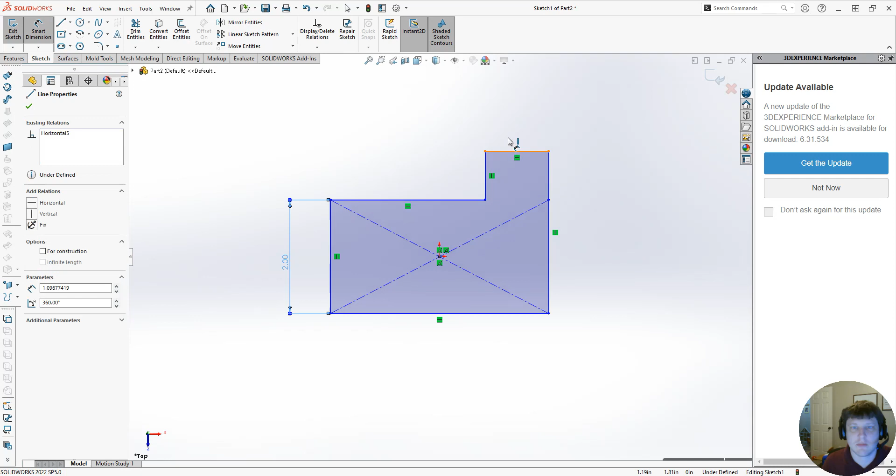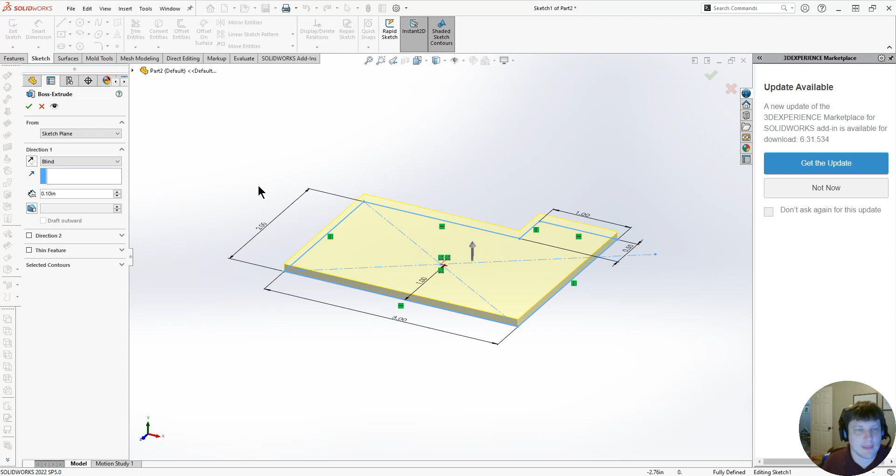And we'll just make that 2 inches, 1 inch, 3 inches. And since we lost our concentric there, or our center line there, we'll just make that 0.5. So there, we're going to make it half an inch thick.

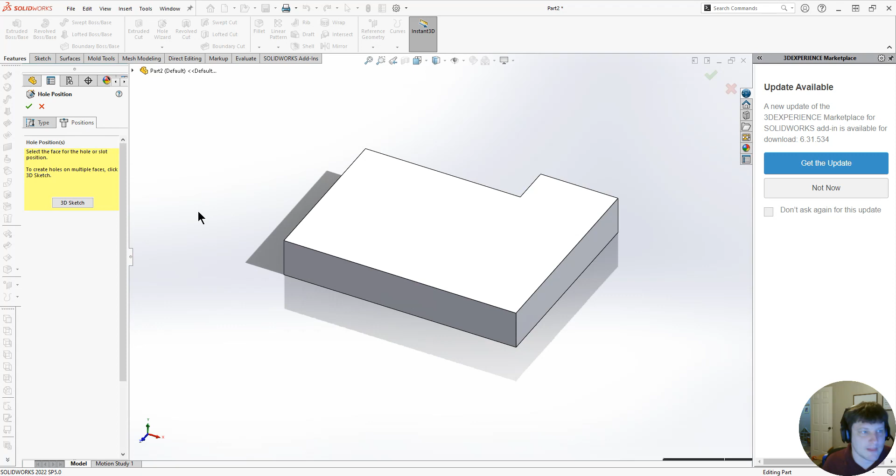Now we want to put some holes in it to mount to. Just want standard holes. Positions. So we'll just place some holes.

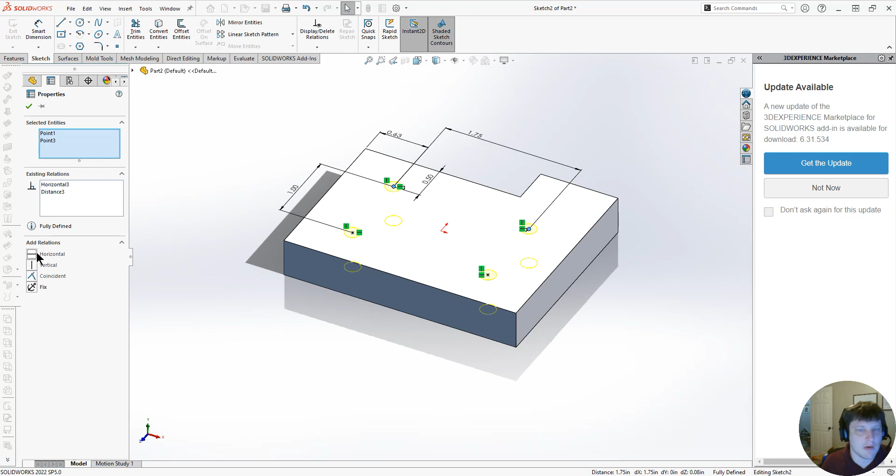Always constrain your things. Leads to so much happier times whenever you need to make modifications. Horizontal. Now I got those holes constrained. Through all, I don't really care what size they are.

Okay, so now let's finish off the top of this. Add some fillets. So right now this is just a solid block. Half inch thick, not a good candidate for injection molding. You want minimal wall thickness for injection molding. But we're going to get to that.

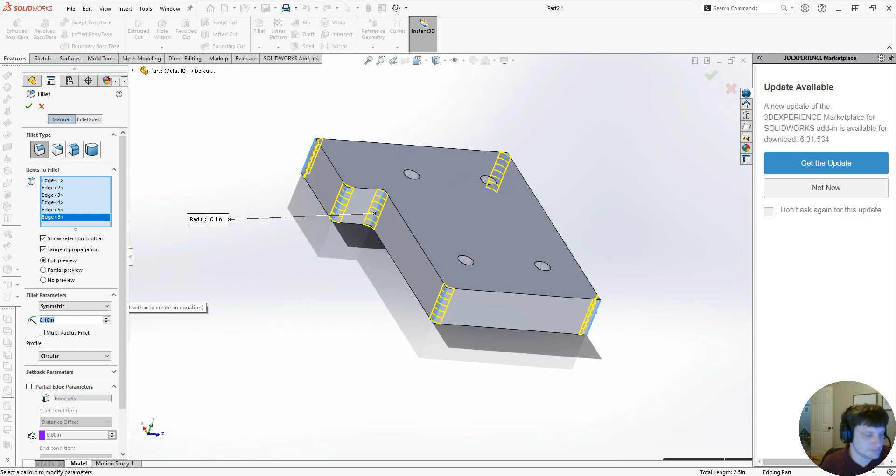So we're going to add some radiuses. Let's make them... too much. 1/4 of an inch, that'll work. And then we want a radius on the top. Oh, before we do that, let's draft this bad boy.

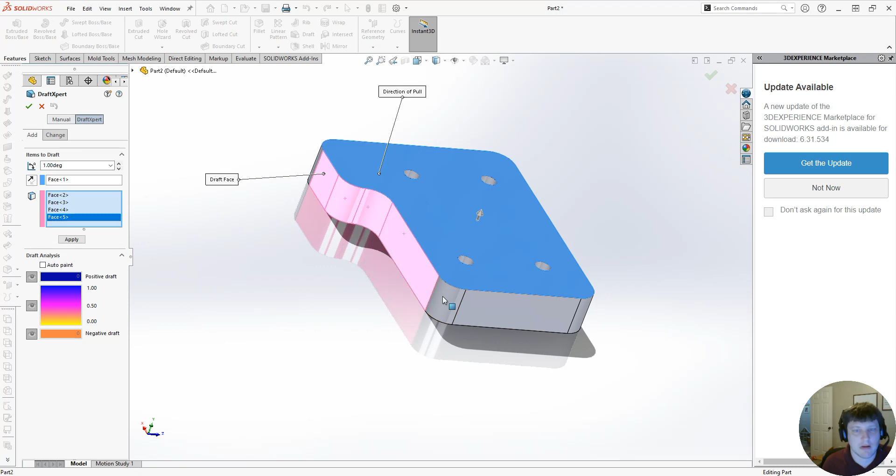Anybody know a way to do this without having to click every single face? That's been frustrating me in SolidWorks for quite some time. Give it 3 degrees of draft. There we go.

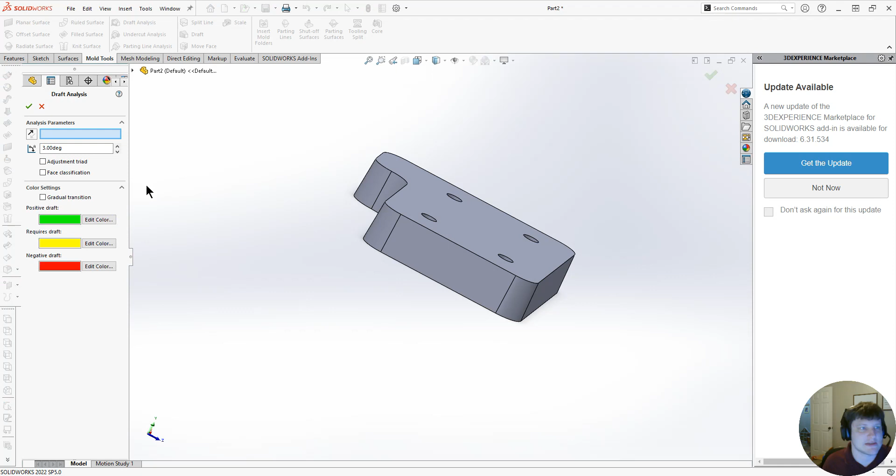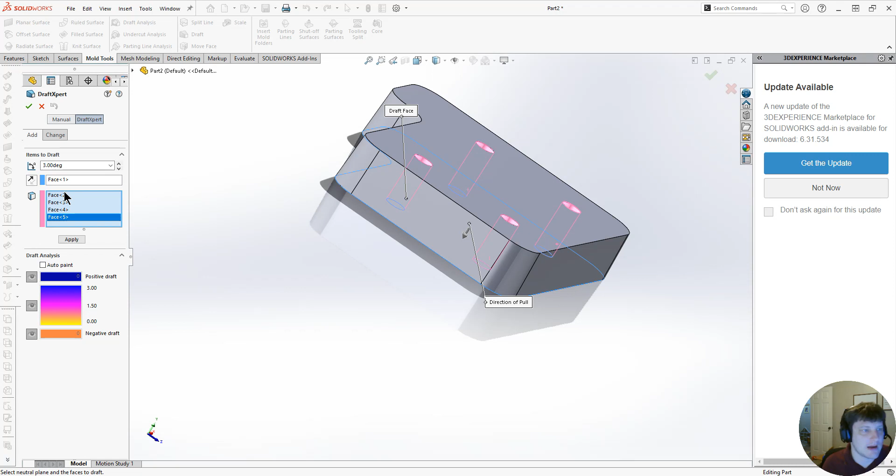Now you can see. So let's go to Mold Tools, Draft analysis. There we go. Our draft is all in that direction. So we're good. Now our holes should be drafted as well, so we'll go ahead and add some draft to those. Draft them from this side. Just 1 degree of draft on those.

So now let's do draft analysis again. Oh, that's why, 1 degree. So we can see all those surfaces are red. All these surfaces are green, which means that's the split of the mold.

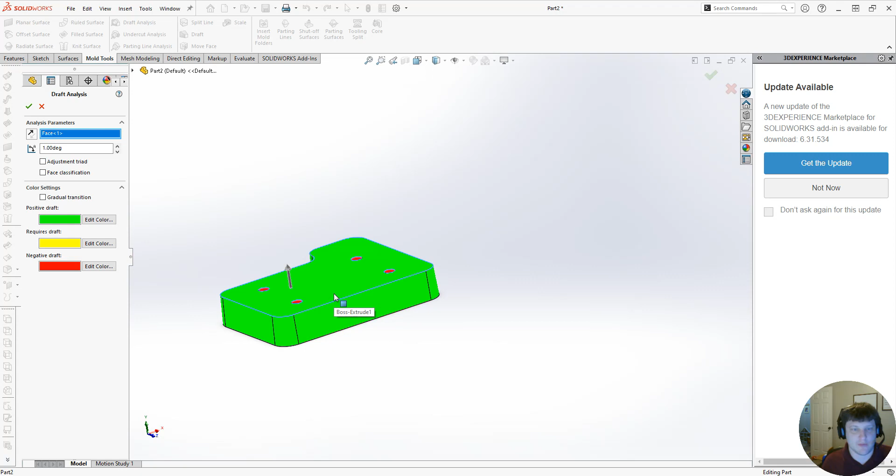So the green will become the cavity and the red will become the core, or the green will become the part where the plastic is injected, and the red will be the part that moves, that pushes the part off. So now we'll do one more thing here. We will shell, and we'll make it 0.085, and we'll shell it.

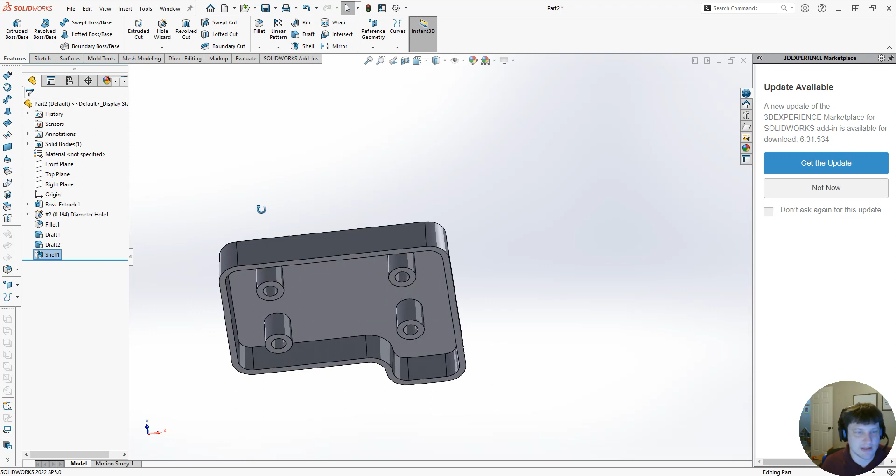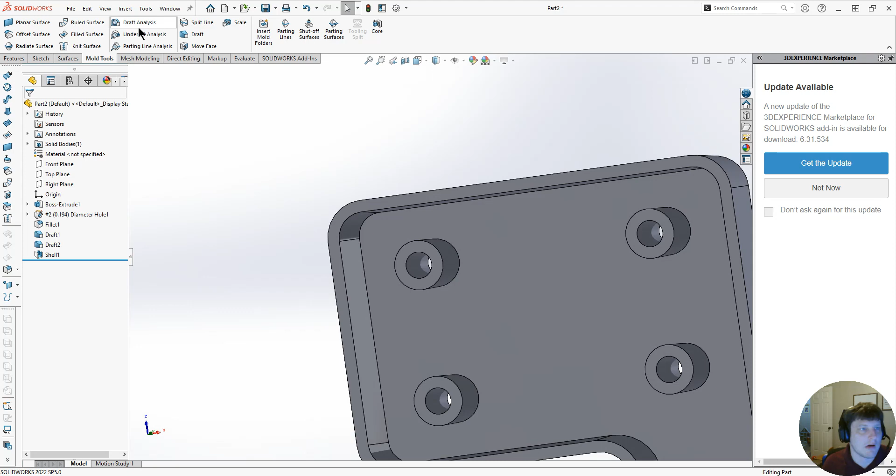So now we have a small problem. As you can see, if you look at draft analysis again, these are in the wrong direction, so they'll get stuck. So we can't have that.

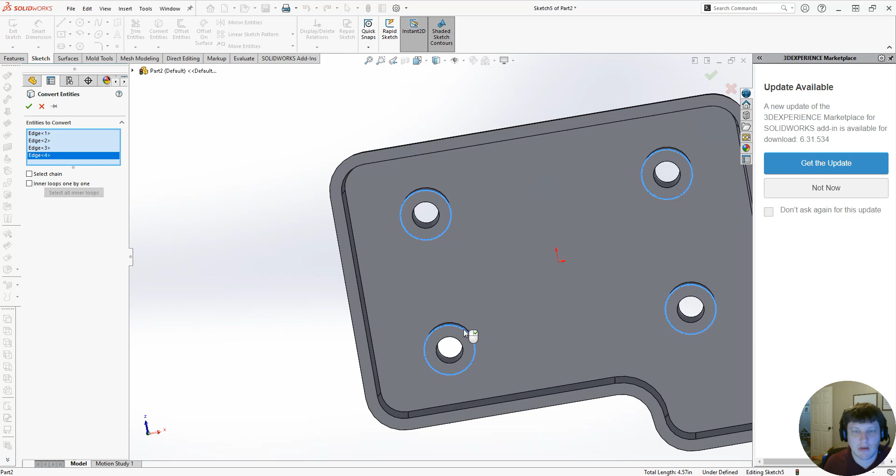So features, extruded boss/base, convert. Convert, extrude, draft outward. 1 degree. Oh. Up to surface. And we'll have to edit that sketch and grab our holes.

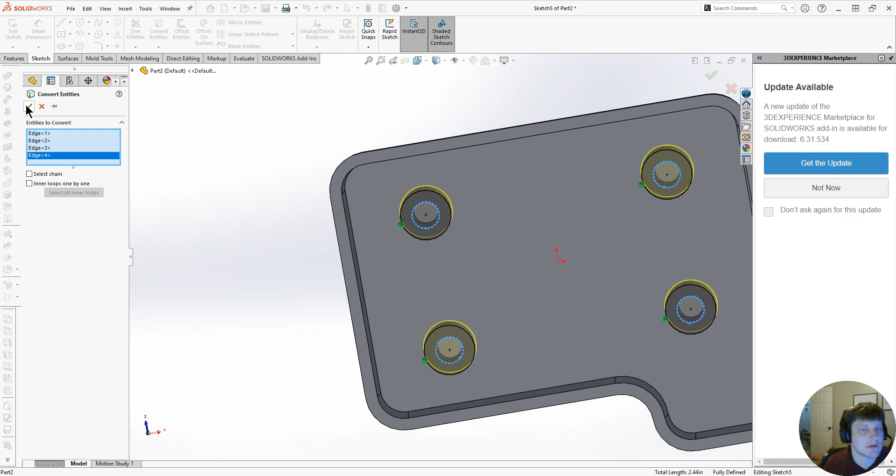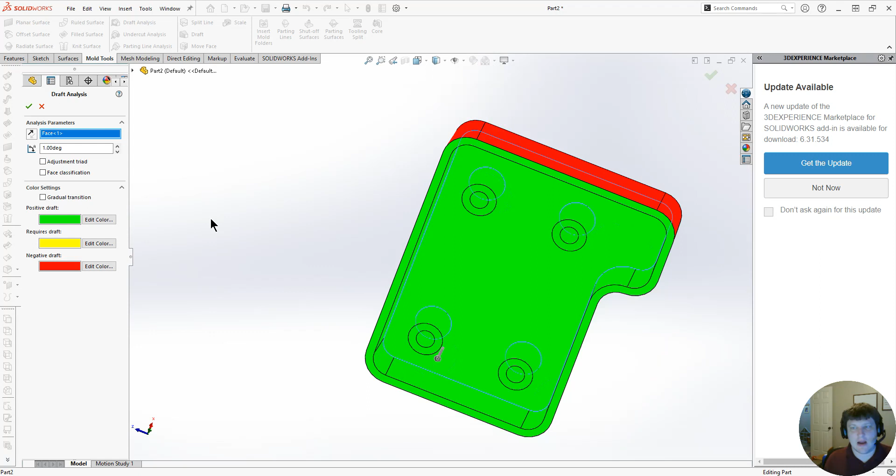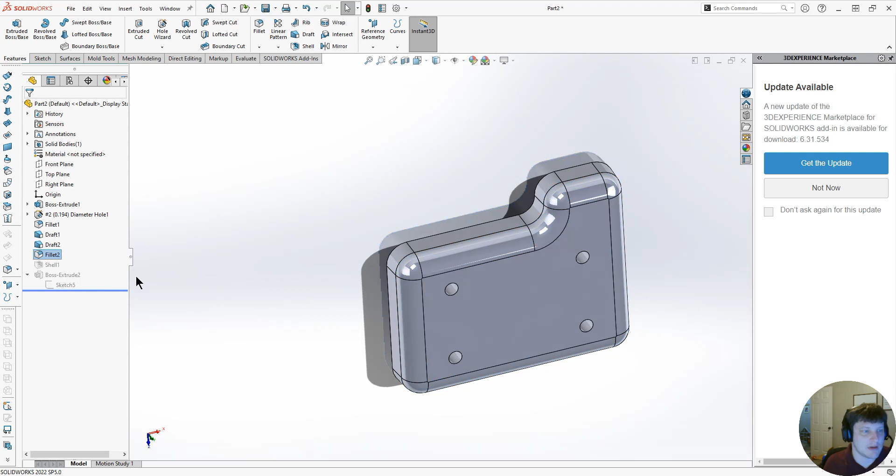There we go. Now if we go back to draft analysis, select that face, 1 degree, we are golden. So now there's one more thing. I want to go back before the shell and throw a fillet on that face and go back. There we go.

Now we'll do ribs. Let me see what button. That's not it. Yeah, bear with me. I gotta remember what my buttons do. So let's just draw a rib from here to here, from here to here, here, here, here, here.

Ribs help add stiffness to your injection molded part. A lot of times when you see an injection molded part break, it's because it either didn't have ribbing or the ribbing wasn't in the right places.

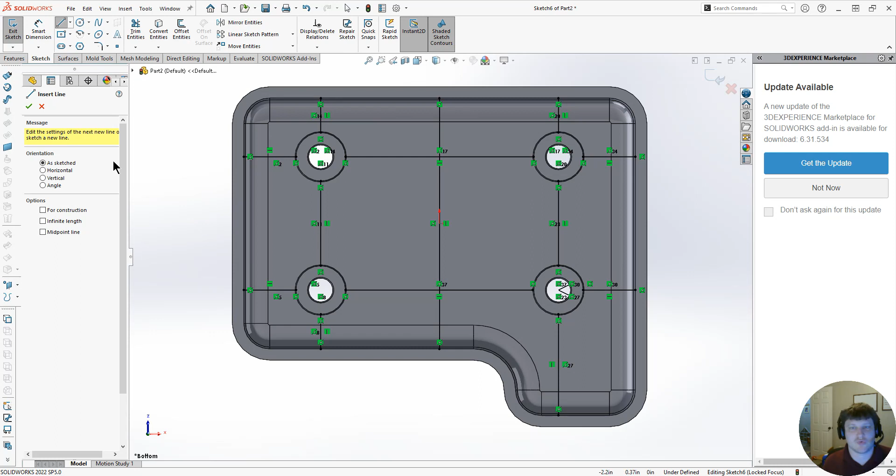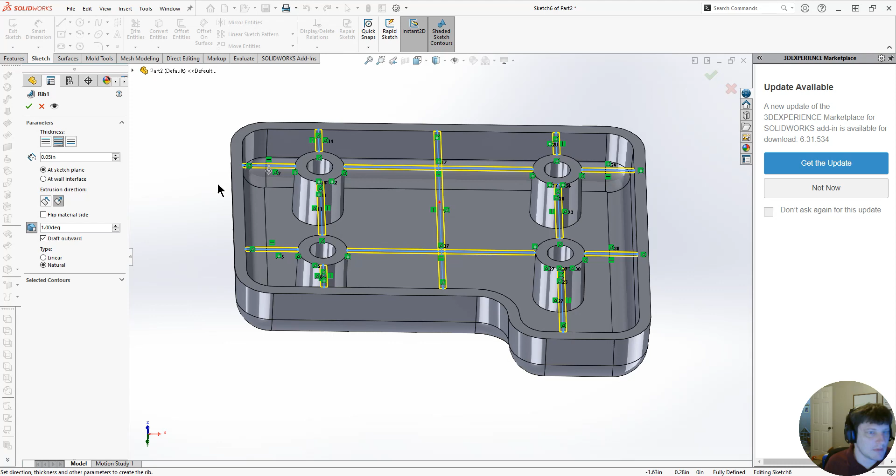That's sufficient for our shot case. Now the ribs should be 70% of wall thickness. So 0.05 would probably be good. And 1 degree. And there we go. Now we have ribs. Couldn't remember for a second.

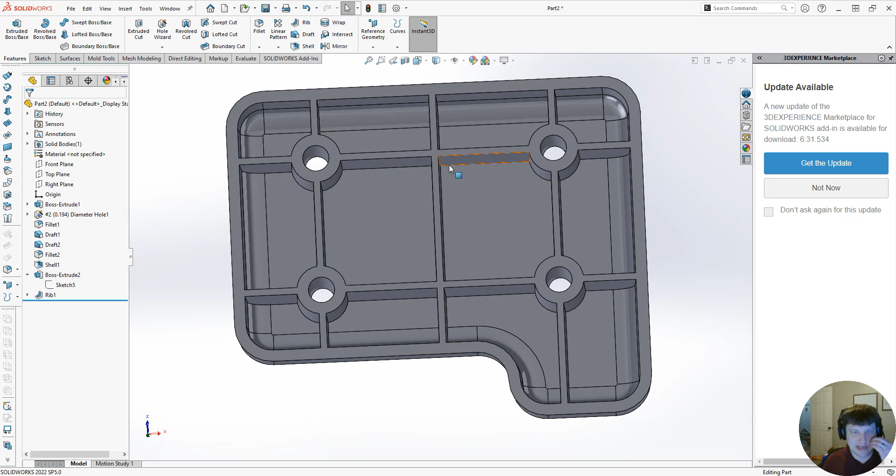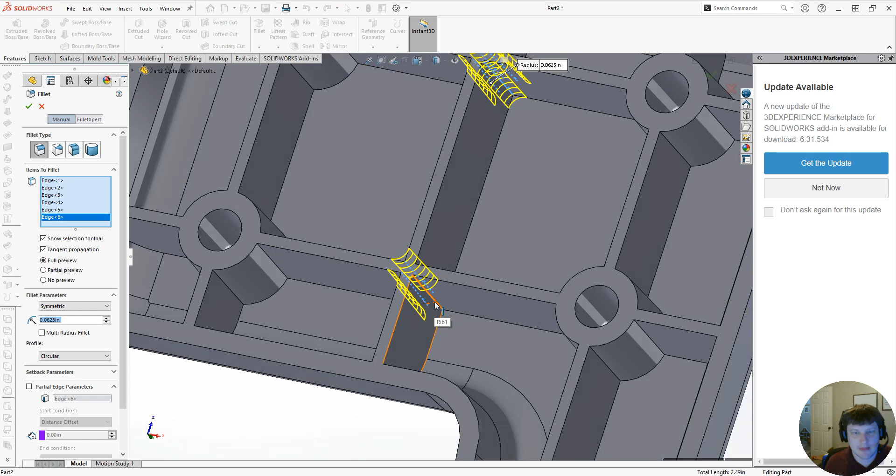Now we could add radiuses to these corners, which actually we probably should. Maybe a 0.0625, so that looks perfect. The reason why I want to do this is because I want to add a place for an ejector pin, because these ribs will stick in the mold. So if we can have an ejector pin on them, they will be more likely to release.

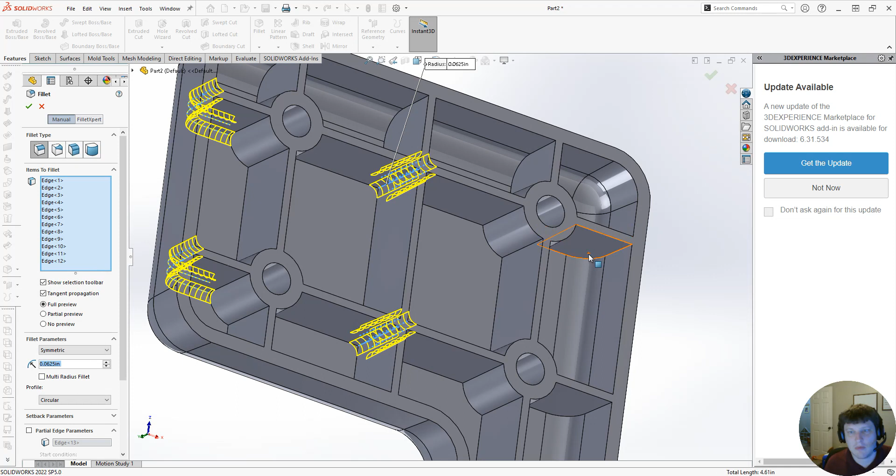So let's just get one there, one there, one there, one there, one there. Oh. There, there, one there, and one here. This way I can have an ejector pin in all these locations. Functional, not exactly the prettiest thing you're going to do.

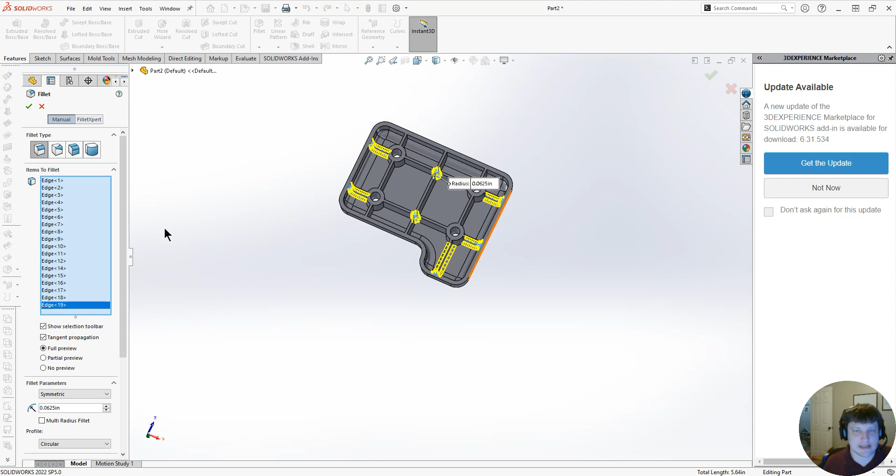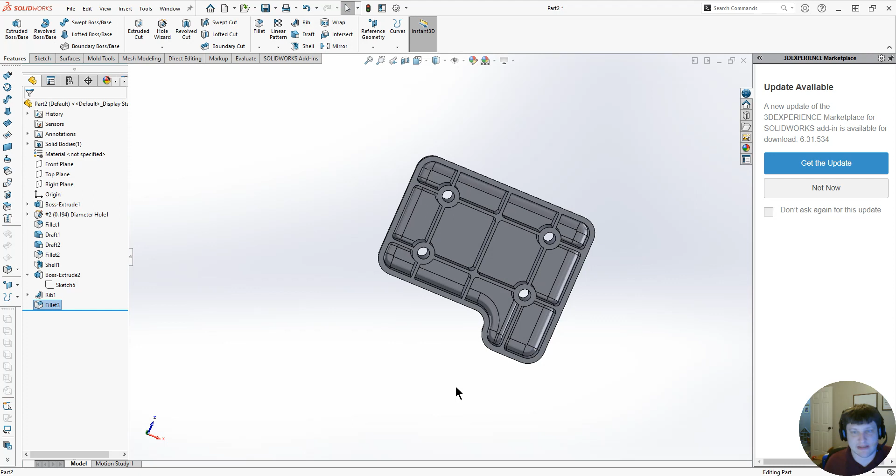But there we go. The only thing you do risk is the possibility of sink marks here in these radius locations, which is a cosmetic defect that can cause injection molded parts to be rejected, but we're going to take that risk. So that's our part. In the next video, we'll step it out into Creo and design a mold for it.